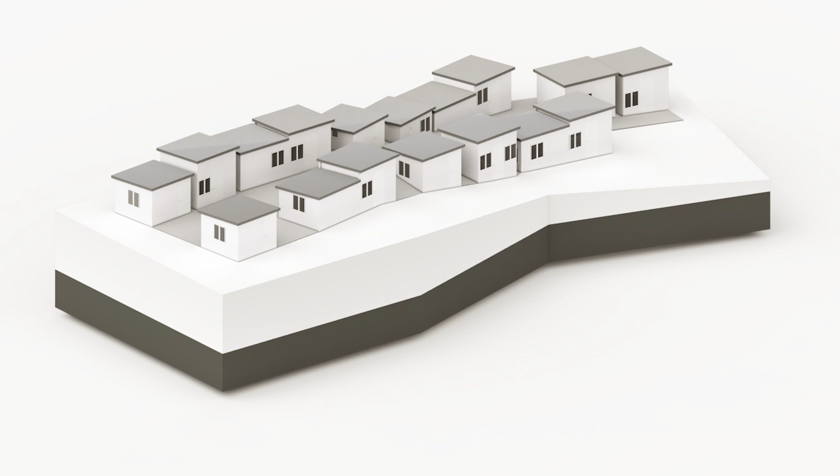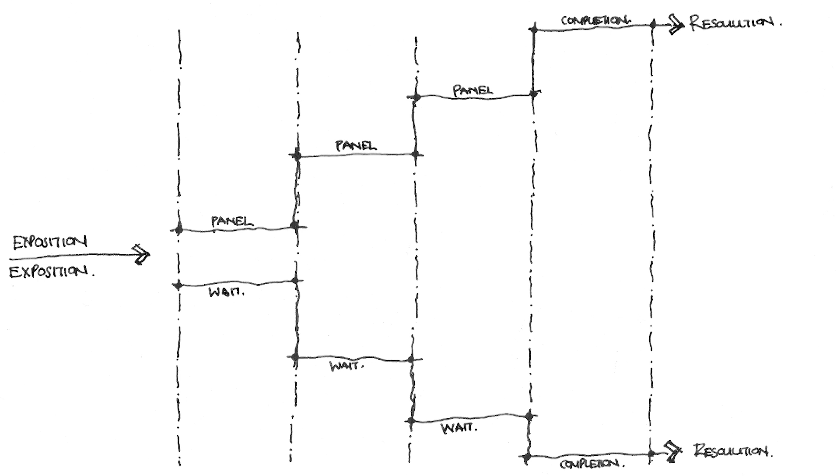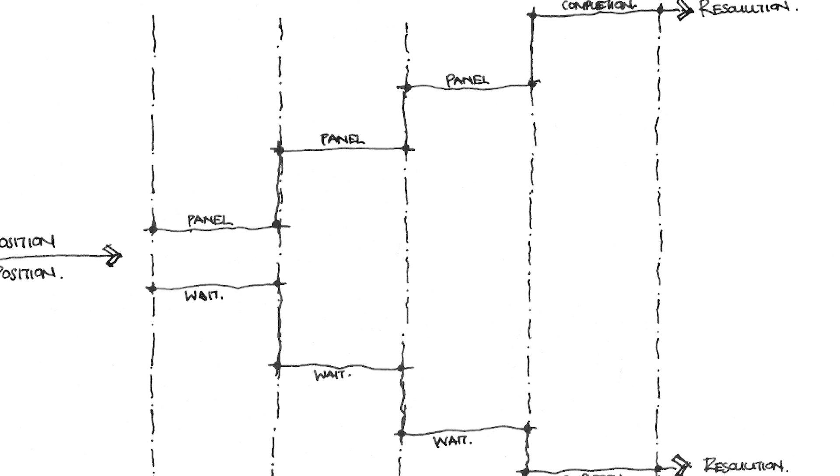With each incremental stage of installment, factors such as comfort, health and structural stability will improve until a climax or resolution has been reached. This process mirrors that of RDP housing, but inversely: with each consecutive step of waiting for the structure to materialize, health, comfort and structural stability decline until reaching a climax or resolution where one truly relies on the structure having been completed and ready for occupation.

Prefabrication is not the most widely utilized construction system in South Africa. This has resulted in ignorance and a lack of availability of materials for lower cost projects. An important aspect that follows the panel's ease of use is availability. It is proposed that these panels could be freely available at any local hardware supplier, challenging the common approach and thought process of brick and mortar, and even more so the use of conventional materials in structures.

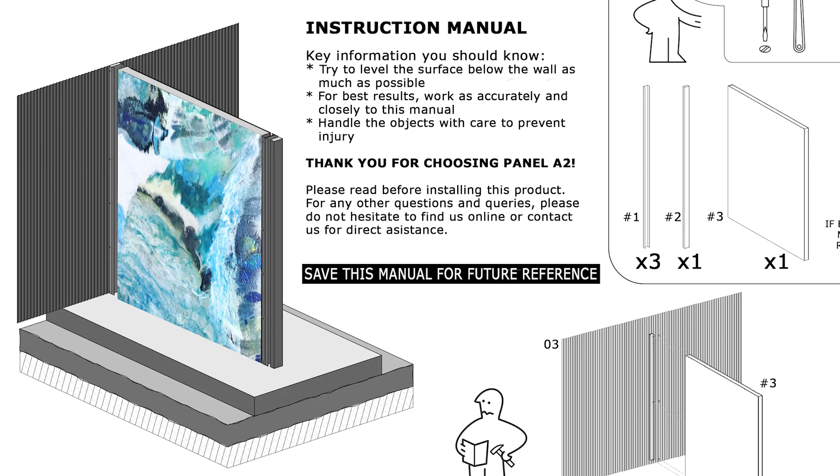Alejandro Aravena, winner of the 2016 Pritzker Prize, suggests an alternative solution to the current approach of low-cost housing in Chile, South America. It is suggested that this alternative solution can be utilized in South Africa, as the informal settlement crisis relates to the existing self-built dwellings. This philosophy, in the context of this project, will be that of the panels acting as a prompt solution to the poor living conditions exhibited in informal settlements, fitting into the existing immediate environment while being able to incrementally expand upon it.

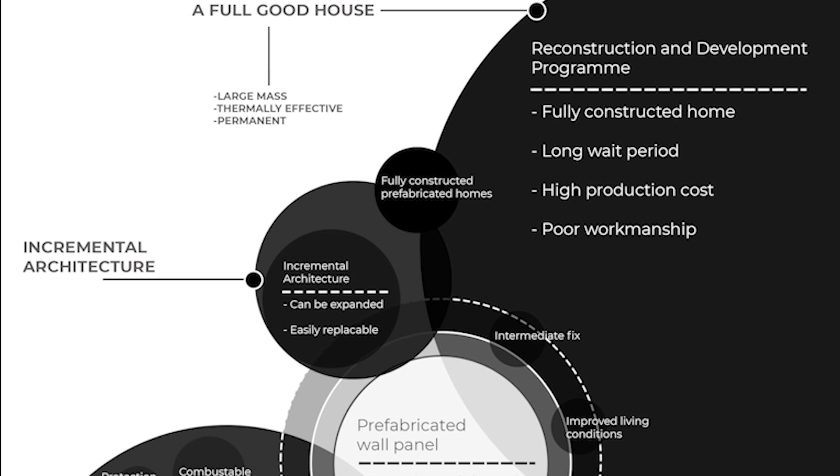According to Aravena, if people can't afford a large good house and are often left with smaller homes or building blocks, why not give them half a good house instead of a finished full house? This philosophy of half a good house could serve as a pragmatic approach to the housing shortage experienced in South Africa. By applying it, one can improve more dwellings in a shorter span of time by adding to existing structures rather than fully replacing self-built dwellings with RDP homes, ultimately increasing the quality of life as well as the architecture of informal settlements.

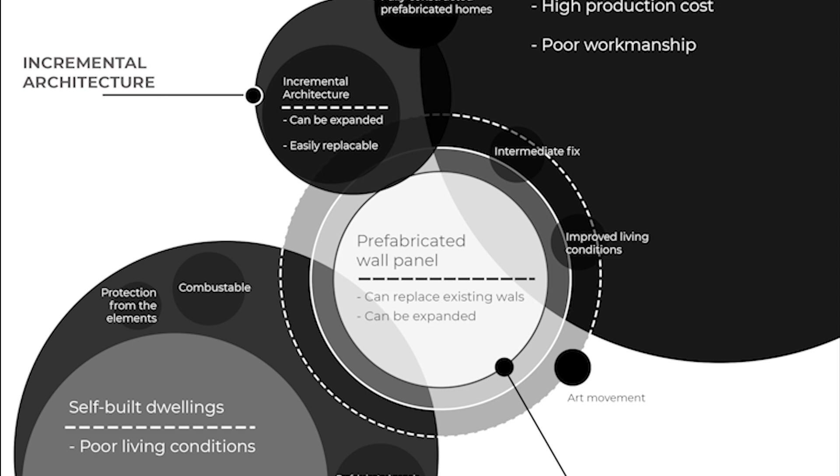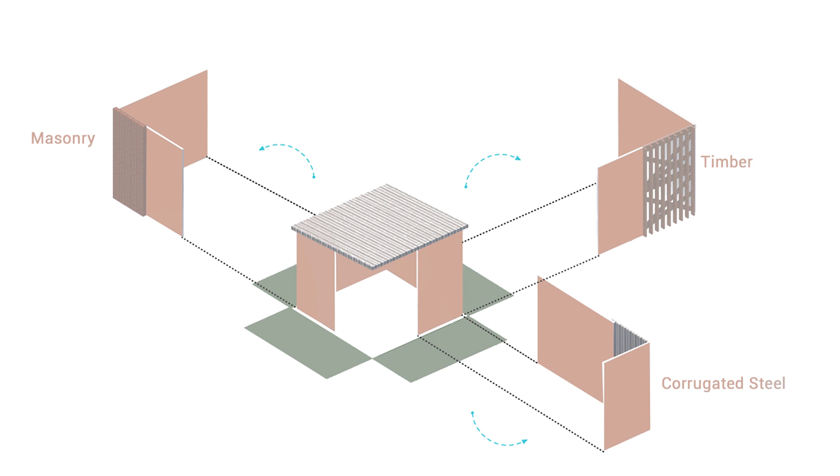Observations indicated three main materials found in informal settlements used in the construction of self-made structures. These include, but are not limited to, corrugated steel sheets, timber paneling, and masonry elements such as concrete blocks.

To address the most crucial and susceptible occasion for failure, the connection to the structure will require a degree of leeway to account for discrepancies anticipated on site due to uneven and unregulated workmanship.

The panel will be installed onto existing structures by fixing screws through the existing structure and the galvanized channel. Between the channel and the galvanized sheet or existing structure, a closed cell foam closure strip will be inserted. This strip will prevent air leakage, moisture penetration, and a gap for insects to enter the structure.

The prefabricated panel will be inserted into the channel, slid in, and fixed on either side with screws through the cover plates. These cover plates will diminish the threshold between the structure and the new prefabricated system, attenuating the newly created threshold between existing structures and the new prefabricated panel, creating a seamless edge and the effect of a floating wall.

In the interior, elements are present that will create a more practical and user-friendly experience. A hidden electrical cable system will allow the user to utilize a standard approved extension cord plugged into the existing structure's electrical grid to supply electricity through the new panel, without any cables being exposed and posing a threat. To prevent users from using a hammer and nails to hang wall decorations, a pre-made groove with a sliding hanger will grant the opportunity to hang wall decorations throughout the length of the panel without the need for ironmongery.